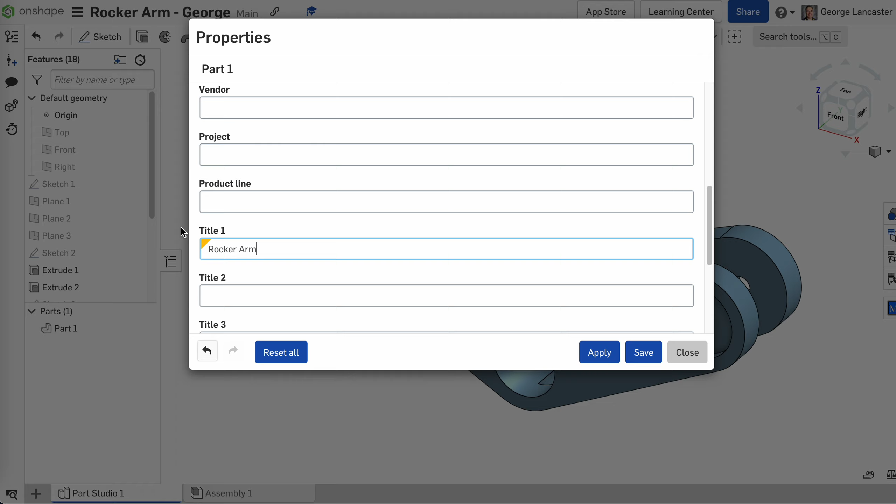So first thing I'm going to do is right click on part one, go up here and choose properties, and then I want to rename it. So I'm going to call this the rocker arm. And then I'm also going to go down to where it says title one and add that same information in title one. So title one, title two, and three, those are automatically going to be placed on the drawing. And then whatever the name is here is going to show up in our assemblies when we start making some assemblies in the near future.

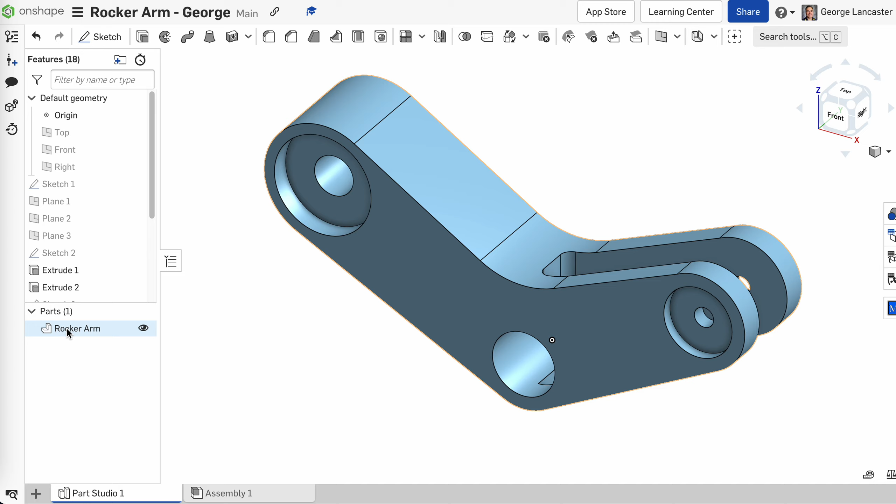So now I'm all set here on the Part Studio side. I'm going to come over, and instead of clicking the plus down here to make my drawing, I'm going to right click on rocker arm and choose create drawing of rocker arm. That's going to let me choose 4 views down here. So Onshape will automatically place my front, right, top, and ISO views, and also pick a scale that it thinks is appropriate for the drawing.

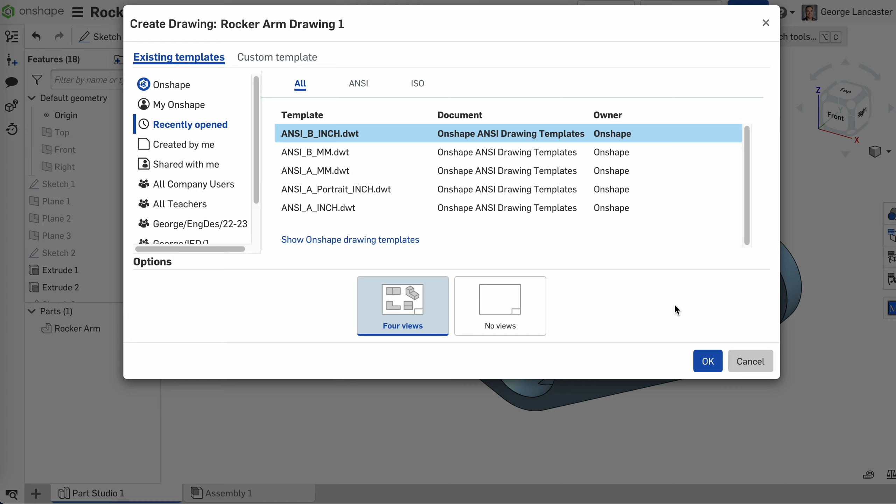I'm going to choose ANSI B inch because I made my part in inches, and the B size paper is my favorite paper. So then when I click OK, it's going to try to decide what size, what scale to use, and it's also going to add all the other information that I have.

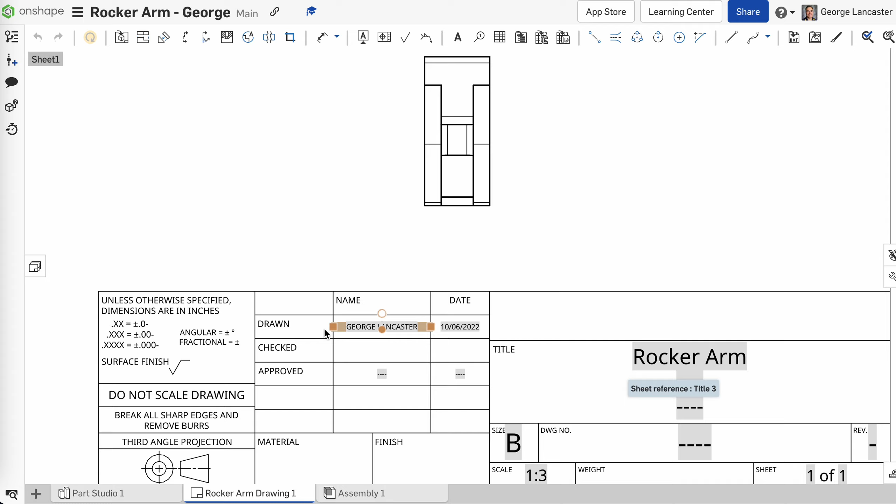So notice now it says rocker arm down here in the title. If your teacher wants any other information, you can add it under Title 2 or Title 3. It does have my name down here in drawn. It's got the scale and the paper size.

I don't love 1 to 3 for this one. I think 1 to 2 would be a little bit better. So I'm going to come over here to some gray space, choose sheet properties, and I'll just change that to 1 to 2. But the computer automatically came with something pretty close, and so I really think that saves a little bit of time.

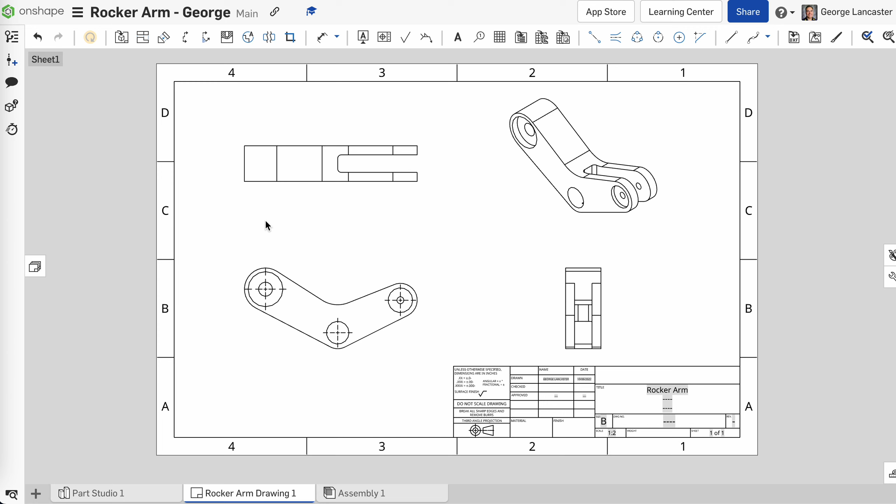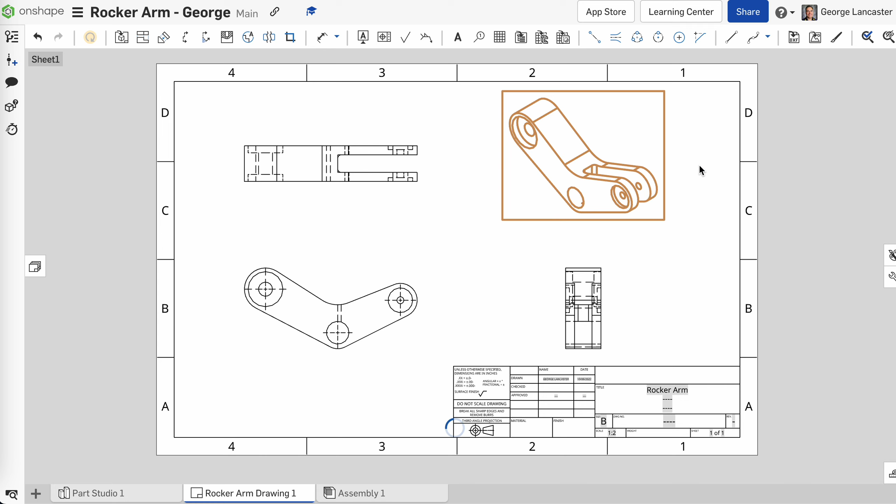The other things we want to do before the drawing is done is just update the views. So I like to see hidden lines, so show hide hidden lines on my front view, my top view, and the right side view. And then also the isometric view, show hide shaded lines. I don't really like hidden lines on my ISO views, but I do like it to be shaded and get a good view of what it looks like.

So now my drawing's done. The last thing to do is just to save it. So you have some choices here. If your teacher wants a PDF, you can come up and you can do print. That will open a new tab with the PDF.

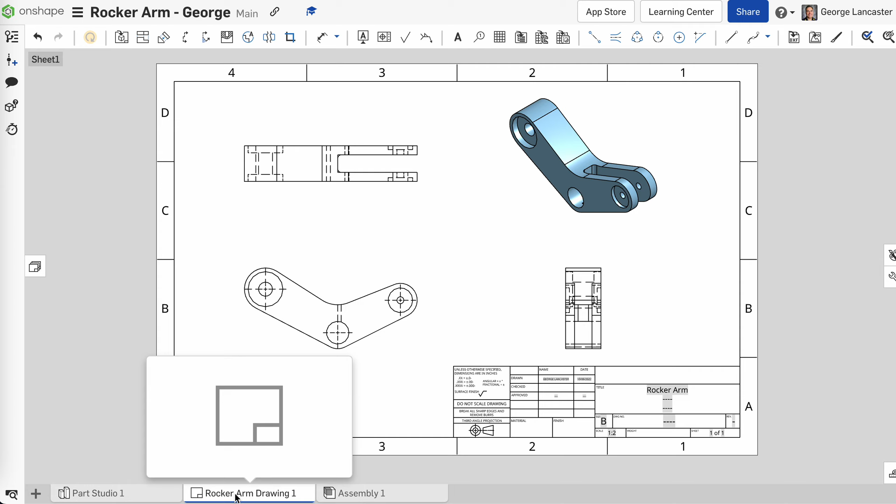If they want a JPEG or a PDF, another choice is to come down to RockerArmDrawing, right click and choose export. And in here, if you want a PDF, that's great. If you want a different format, you can choose that up here. You can also choose whether you want to download it or have it automatically stored in your Google Drive. Whatever you want to do based on where you're at and what your teacher's looking for, you've got those choices under export.